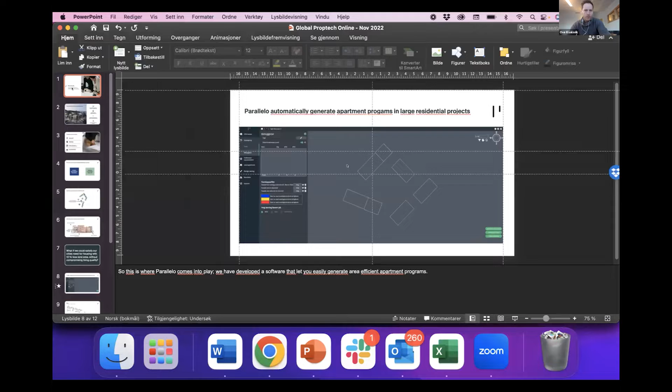Thank you very much. Let's see if I can get this going. Can you see my screen? Yes, I can see your screen. If you can put it on presenter mode, it will be even better. Yeah. Even better, yeah. There's so many things. Here we are. Now it's in presenter mode as well, and you can see it all. More room to play. More room to play. Perfect. Thank you very much.

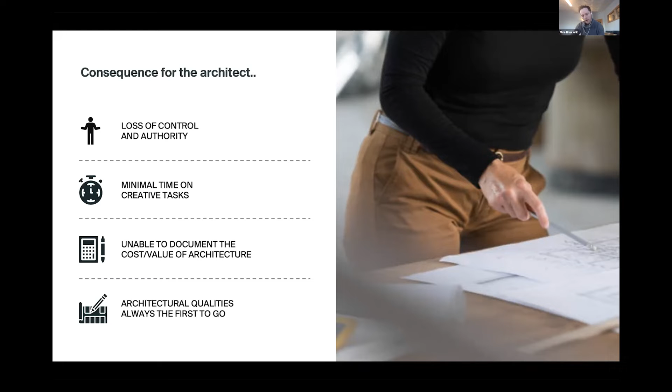So often we see in projects that architects tend to kind of lose out, often because the subjective soft qualities that they would want to add to the project cannot be as easily demonstrated in value as the more objective KPIs, such as how much gross area do you have in this project? What is the gross to net factor? How much sellable area do we have? What are the cost estimates? These are much easier to evaluate.

So thus there is this underlying conflict between the owner of the project, which is the developer, and what at least previously was the owner of the process, which was the architect on the right. And this is getting closer to my point now, because a consequence of this is that architects look like they are compensating in order to protect their interests. And I might step on a few toes here, but I'm coming more or less from the outside of the industry. It seems like the architects know that they eventually will lose arguments down the road. So they want to work as isolated as possible in the early stages in order to make sure that their interests are not challenged too much.

And they also work quite linearly. So they mainly focus on the outer premises first, making choices on building volumes, the structure, facades, even making material choices before they even consider other aspects, such as who is the target group, who is meant to live here, how should the apartment program look?

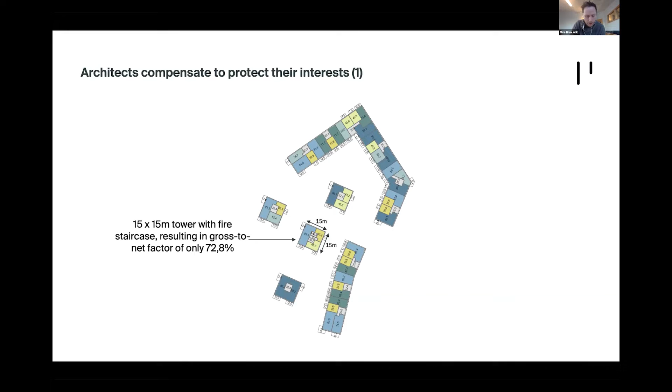And the ultimate consequence of this, as we can see here, is that the efficiency of the design is often low. Like in this case, the architect had chosen a solution that results in a very low utilization rate. As long as demand for housing is higher than the supply, this is not a very good use of resources. If they had modified that tower building a little bit, they could easily have fitted 8 to 10% more square meters inside it, making room for significantly more people within the same area. And from a sustainability point of view, that's quite substantial. And this is basically what we've seen in many of the cases we have been involved with.

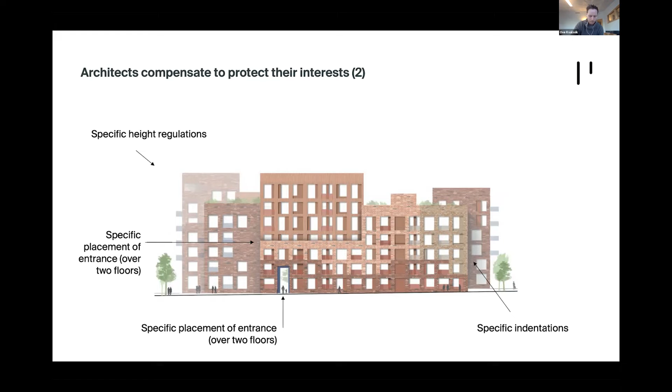And I think this is a potential that is not spoken about too often. When we talk about new technology within the real estate industry, we often talk about how we can reduce CO2 emissions by 40%. And we believe much of this can be achieved simply by adding more livable square meters into the same areas that we are already building.

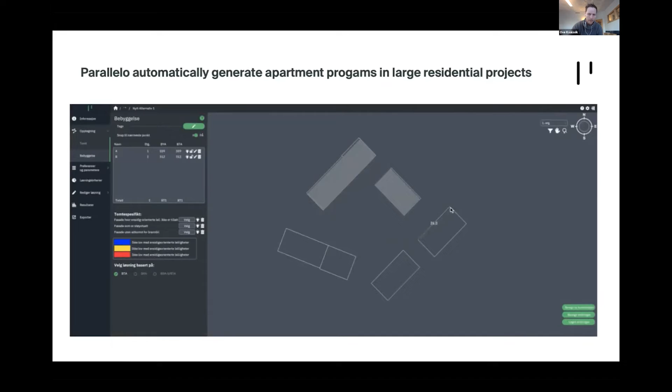So when we talk about parametric design, this is where Parallelo comes in. What we have done is made parametric design software that lets you easily trace up the volumes that you are building and easily generate the apartment programs automatically based on the input that you provided. And these could be parameters such as what types of apartments you have, wall thicknesses, types of staircases, how many 2, 3, 4 bedroom apartments you should add, etc.

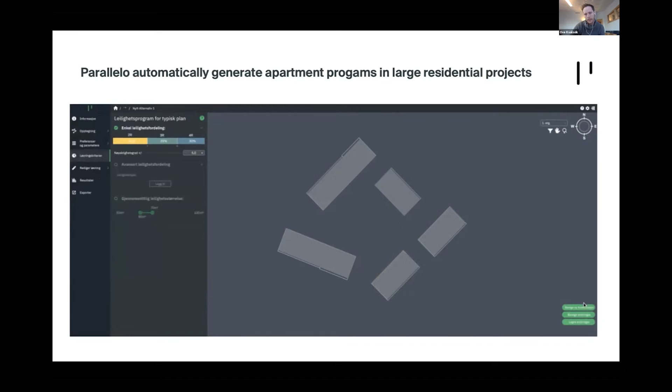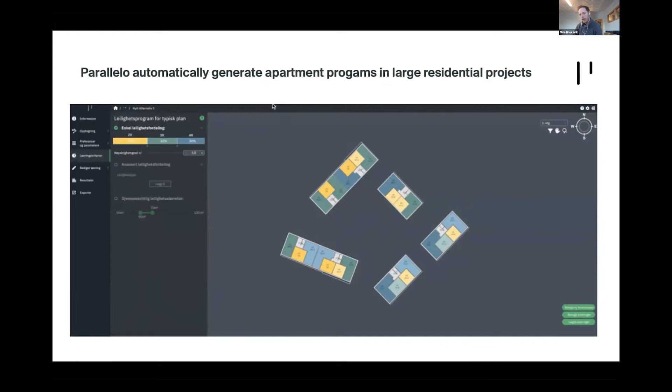So you easily just work parametrically, and the program of the software will return an area-efficient apartment program with high-quality apartments. And this opens up new possibilities, that you could work both with the outside premises and the inside parameters simultaneously. And the results so far have been very good.

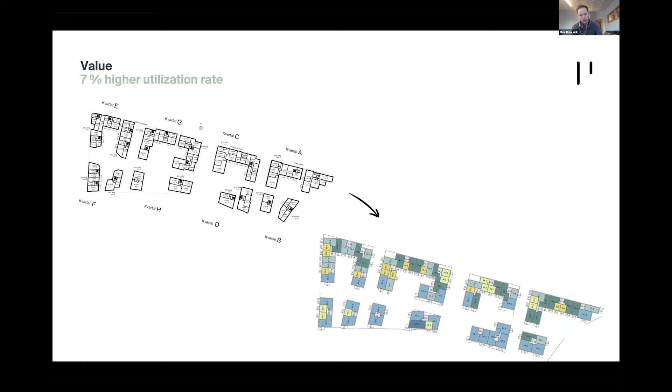And this is another example. The examples are quite alike. Outer premises make unnecessary limitations on the utilization rate. If we go in and use parametric design to design the apartment programs, utilization rates go significantly up, and the list goes on.

And none of these two examples achieved the 10% more which I aim for. But remember that in both of these cases, Parallelo has operated with the exact same parameters and the exact same constraints as the solution we benchmark against. So the 6 to 7% higher utilization rates are just pure optimization. It would be even higher if we could work more dynamically with the outer premises simultaneously.

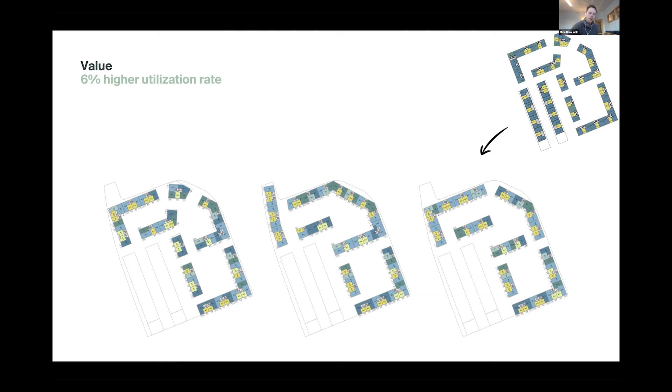So this is where we believe parametric design in this dimension comes in: it's not just an optimization tool as such, but we believe we could break down the silos and work better together, maybe especially real estate developers and architects, but also maybe real estate agencies, in order to have a much better understanding of who the target groups are that are supposed to live here, and then work more closely with the architectural concepts and the inside of the buildings to both make sure that the apartment programs fit the needs of the target groups, but that the utilization rate is maximized.